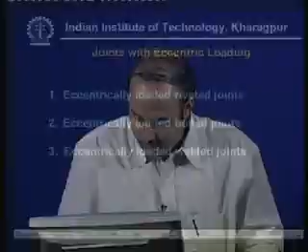the joints with eccentric loading. We have eccentrically loaded riveted joints, then eccentrically loaded bolted joints and eccentrically loaded welded joints.

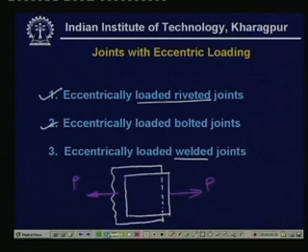Now, let us come to the first case, eccentrically loaded riveted joints. Rivet joints, as we have studied, look like the following. If we have loading here and load applied here P, then the joint load... these are rivets. The rivets are meant to take load primarily in shear, and here you see there is no bending moment acting on this joint, because if we take one small section of it, that is one pitch, then the load is passing normally through the center of gravity of the riveted joints.

But if it does not pass through the center of gravity of the riveted joints, that happens sometimes in the case of brackets or in some other load carrying members, as we shall see in different cases, then the loading becomes complicated and eccentric, and the stresses become also complicated. We have to take utmost care so that the rivet stress does not become too much.

Similarly, we have the eccentrically loaded bolted joints. Now, here rivet joints mainly take load in shear. The bolted joints take primarily load in tension. You may remember we talked of the effect of pre-stress. There we had to initially tense the bolt. By initial tensioning, we relieve the bolt of the final loading if the loading is tension type, but primarily we always talk of the tensile load in a bolted joint.

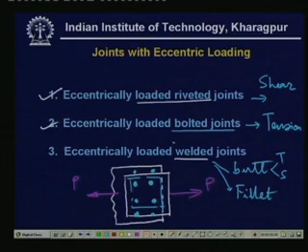This must be very clear from the last lecture. In this lecture we are going to study something of these kinds of joints, that is eccentrically loaded riveted joints, eccentrically loaded bolted joints and eccentrically loaded welded joints.

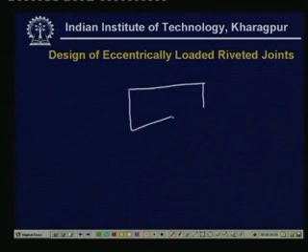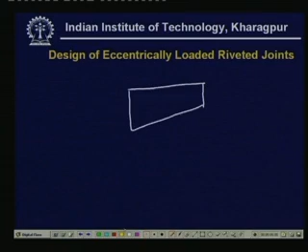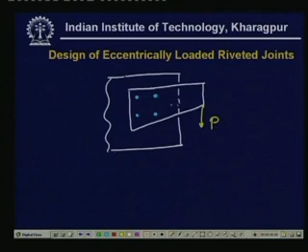Let us now start the discussion of eccentrically loaded riveted joints. See, if we have a rivet joint of this shape, let us say this is the plate which is acted on by a force P over here, and there are few rivets. Let us say there are some rivets here, and it is connected to another plate. Now, clearly you see the cross section, that is the load does not pass through the center of gravity of the riveted joints.

And what is meant by the center of gravity of the riveted joints? Now, if the cross sectional areas are A1, A2, A3, Ai, where i equals 1, 2, 3 and 4, then the center of gravity of these joints is given as x bar, which is equal to A1 x1, the x coordinate of the first rivet, plus A2 x2, plus A3 x3, plus A4 x4, all divided by the total area A1 plus A2 plus A3 plus A4. So this is the area of cross sections giving the center of gravity, the geometric center of the rivets. Similarly, we have y bar, which is equal to summation Ai yi bar.

This x1 bar, x2 bar etc., these are nothing but the x coordinates of the ith rivet. Similarly, we have y coordinate, and if we do this, then we get x bar and y bar, the center of gravity of the entire riveted joint. Let us denote the joint, that is the center at this point. Okay, so this is the center.

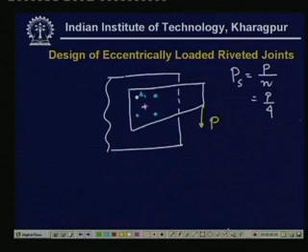If we replace this load, now it is clear from statics that within one rigid body we can remove this load, we can shift this load from one point to the other, provided we add some amount of couple or some amount of moment about the next new point. Let us see what does it mean if we remove this load.

Now, what we have done essentially is to take the load here, so this is the load, but now we have to add again a moment.

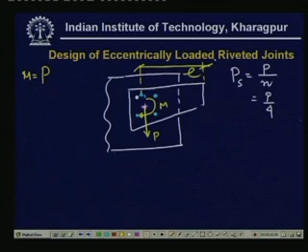And what is the moment? The moment will be equal to, we have to add the moment is definitely clockwise, and this moment M will be equal to P times the length of the arm, and this is the distance. If the eccentricity is e, then this is nothing but M is equal to P times e.

So, this moment has to be added. Now, the internal forces within the rivets will be such that they should balance not only this external force P, but also this external moment M. As we have discussed, because of the direct load P, each of the rivet will experience some shear load, and which is equal to P divided by N, and for 4 such rivets here we have P by 4.

Now, this is true for all the rivets. Now, we have to calculate the effect of the M. Now, here we make an assumption, that is, if you look at this riveted joint more carefully, that is, if you enlarge it, this is this part which I have enlarged. Then the center of gravity is of course here.

Then we make the assumption that each one, the load carried will be proportional to the distance from the center. That is, if let us say this is F2, this force is let us say F1, and this is perpendicular to this line joining the rivet, the first rivet and the center of gravity, and this magnitude F1 which is proportional to this distance.

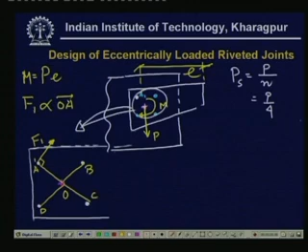If we denote this by OA, B, C and D, then F1 is proportional to the magnitude of OA. The magnitude of OB or magnitude of F2 that is acting on this rivet is proportional to this length OB, and the direction of this force is perpendicular to it, to the line joining OB.

Similarly, on C we have F3 which is proportional to OC and direction perpendicular to the line joining OC. Similarly, OD this way. F4, the magnitude is proportional to OD and the direction is perpendicular to the OD.

Now, here we make these assumptions, and with this assumption we can calculate further. What we see, if we denote this by R1 vector and this is R2 vector, R3 and R4, then we have the following relationship, that is

F1 times R1, the couple about point O, plus F2 times R2 plus F3 times R3 plus F4 times R4, this plus M will be equal to 0. Now, this is the balance of the moment about the point O.

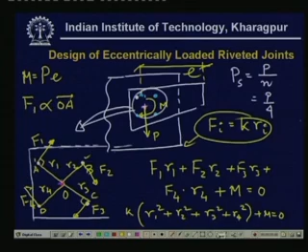So, this is the equation which you get. From this you can solve for K. Directly what you see is that the value of K now is, let us write down in far more legible form.

What you have then is Fi is equal to K, which is equal to minus M divided by summation Ri square, I is 1 to 4, times Ri, and this is equal to minus Pe Ri divided by summation Ri square. So this is now the force acting

on the ith rivet. Now let us see what is the resultant of this force. Remember, we have two forces: one is the force acting because of the direct shear, and each one is carrying the same force, and there will be another force due to the turning action. So we will have to look into the resultant of this force.

Now the resultant will be different for different cases. We study one or two cases here. For the first case, let us say on A, that is the first bolt, we have direct shear force which is equal to P by 4, and we have another one which is perpendicular to this distance, and this is F1.

So with this assumption we make these calculations, we find out the maximum force in such rivet assembly, and then with the maximum force we calculate the maximum shear stress taken by this bolt, and hence we calculate the corresponding diameter, that is we design the joint. So this is the design procedure for eccentrically loaded riveted joints.

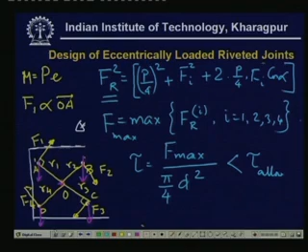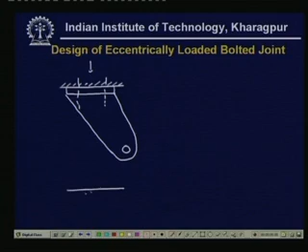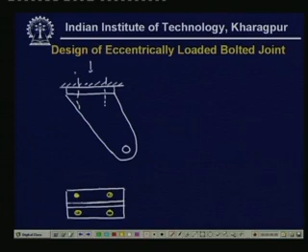Now let us go to the design of eccentrically loaded bolted joint. Here we have two distinct cases. First let us take the example: consider this kind of bracket. There are bolts here, so if you look from this side, top view, now these are bolts, let us say cross section 1, section 2. So there are 4 such bolts, 1 and 2, and the load is acting here.

There is a load P acting. Now you see what will be the effect of P. The P will introduce tension in the bolted assembly. So each bolt will carry some tension, but the tension will not be uniform, because there is a distinct tendency for this bracket to rotate about this point, let us say point A. So there is a tendency that it will rotate about this point because of this load. Therefore, the tension in the bolts will be unequal.

Now what we see is how to calculate the tensile load in the member. We make the static equilibrium, that is, let us say each bolt carries a load F1 and F2. If you write down the static equilibrium equations, then 2 F1 plus 2 F2 will be equal to P, and that is the only static equilibrium equation we have for this case. This is a statically indeterminate problem, because we have 2 unknowns and only 1 equation, so it cannot be solved by means of pure statics only.

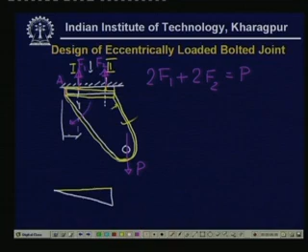There will be some elongation of this bolt. If you draw it elaborately, here this was the initial line, and after that it has rotated here. So now if you denote this length from this point to that point by L1, and from here to there by L2, then this is L1, this point A and point B, and this one is L2.

Now the delta, that is delta 1, the deflection of this, is proportional to this length L1. That is clearly visible because this is a rigid plate, so this angle is constant. So tangent of this angle will be equal to delta 1 divided by this length L1, and the tangent of this angle will again be equal to delta 2, the deflection of this bolt, divided by the entire length L2. So therefore delta 1 is proportional to L1 and delta 2 is proportional to L2.

Then if you use Hooke's law, what you get is that F1 could ultimately be written as F1 is proportional to L1 and F2 is proportional to L2. That is clearly visible because delta 1 is nothing but, using Young's modulus and the original length, let us say the original length is capital delta and the extension is delta 1. So the strain is delta 1 divided by capital delta, which is equal to Young's modulus... I am sorry, this has to go down.

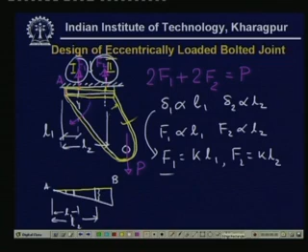Let us come to the next example. Here we have, and we have, let us say, again some kind of arrangement. If you look from this side, then we have this bolt.

So, there are these 4 bolts, and the load is acting over here. The direct effect of P will be to introduce some shear force here, so each of these bolts will carry some shear force.

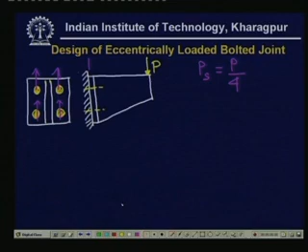Now, what is the effect of this eccentricity? Let us say that there is a distance E from this plane to that of the application of P. Because of this eccentricity, it will try to rotate about this point.

If this is A and B, there is a tendency that it will rotate about this point. Because of this tendency of rotation, there will be elongations, that is, an enormous tensile force will be developed in this bolt.

And again, if you consider the rigidity of this member, that is, if it tilts this way, so this is the tilting, it is very much exaggerated, but the point is that now rigid body statics is not enough, and we will have to consider the deflections, that is the elongations of the bolt. We will have to consider the strength of materials approach.

So, therefore, we make this assumption that this is a rigid body rotation. Now, this bracket is relatively rigid compared to the bolt. So, the bolt gets extended, whereas the rigid body only gets rotated.

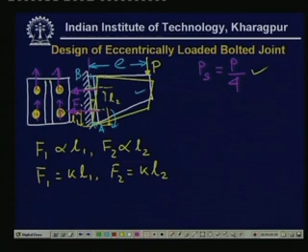If you take the moment about this point, what you get is, considering this direction of force F1 and F2: F1 times L1, the moment about point A, F1 L1 plus F1 times L1, because there are two such bolts. So, twice F1 L1 plus F2 times L2, again twice of that. This is equal to

the external moment, which is equal to P times E. Now, if you use this relationship, that F1 and F2 are proportional to L1 and L2 respectively, then what you get from this equation is twice K, L1 square plus L2 square, will be equal to P times E.

From this you calculate K, which is equal to PE divided by twice L1 square plus L2 square.

Once we have calculated K, then we have calculated F1, because F1 will be equal to K times L1. So this is equal to PE L1 divided by twice L1 square plus L2 square, and similarly F2 will be equal to PE L2 divided by twice L1 square plus L2 square.

Now we have the case where the bolt is subjected to both shear and tensile force. Normally, as I said, the bolts are not meant to carry the shear load. Primarily, the bolts should carry only the tensile load, but if sometimes the shear load occurs, then we have to relieve the bolts of the shear load if possible. So that is done by adding some kind of other bolts, dowel pins, etc.

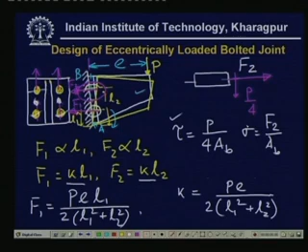This should take off the shear load as small as possible. If you increase the number of bolts, then the shear load may be decreased. So the shear load is reduced as far as possible, but if further is not possible, then we will have to consider the effect of the shear stress as well as the normal stress. We have the shear stress and the normal stress, and then we calculate the von Mises stress.

You know that when we have both the stresses, we can calculate sometimes the von Mises stresses, which is equal to sigma square plus thrice tau square.

This is one failure criteria, where the material fails if this is greater than sigma allowable. Another failure criteria is the maximum shear stress, tau max, which will be equal to square root of sigma by 2 square plus tau square, and this must be satisfied. So these are the two criteria by which the ductile material will fail.

If it is made of brittle material, which seldom happens, then we will have to consider the maximum principal stress, given by the well known formula: sigma by 2 plus under root sigma by 2 square plus tau square, and if the material is of brittle nature, then this should be less than allowable.

So these are the few failure criteria which you will have to consider, but the main important point is that the bolts are subjected to both shear stress as well as normal stress, and when you calculate the normal stress, you will have to make the assumption that the bracket is more rigid compared to the bolt. Therefore, the bracket actually rotates about one of the points, but the bolts will get elongated, and the forces will be found out accordingly using the geometrical relationship. So that must be clear.

This is again a case where statical determinacy does not exist. So this is a statically indeterminate problem, and we will have to take the help of the flexibility of the members. Now this is about the design of eccentrically loaded bolted joint.

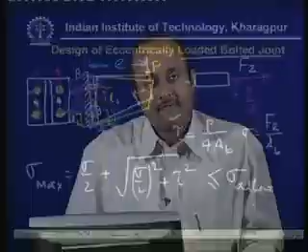Remember, I repeat, we have considered two cases. In one case, the load is acting such a way that the bolts are entirely under tension, there is no shear force, as we have seen from the first example. In the second example, the bolts are now under shear because of the direct action of this force, and it is again partly under tension because of this eccentricity. So eccentricity makes the design of joints quite complicated, as you might have understood by now. So this is about the eccentrically loaded bolted joint.

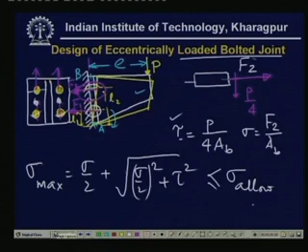Now we come to the third case, where we have the eccentrically loaded welded joint. There are again a few examples, we take them one by one. Let us consider the case where a plate is welded to a structure.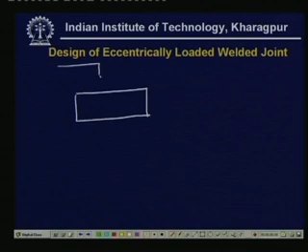Now the welding can be done in various ways. The welding may be on this side, that is, it may be a transverse fillet welding. There are two kinds of welding: one is butt welding and another is fillet welding. Normally, in this case, we use the fillet welding. There may again be two types of fillet welding, one is transverse fillet and another is the longitudinal or parallel fillet. Let us say that here this is a parallel fillet.

So we have the fillet joints here, fillet joints over here, and the load is now eccentric loading, in these directions. Remember, in earlier classes we have studied the design of this welded joint. In that case, the load was along these directions, but now instead we have load in the other directions.

So, what is the effect of that? That is what we are going to study.

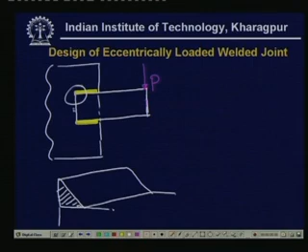Now, if you look a little bit closely, the fillet weld looks like this. This is the plate, and this is the welded part. So, this is the fillet, and the critical section is the section of the throat.

So, this is the critical section, and the failure may take place in this section itself.

Now, when we consider the eccentrically loaded joint, in addition to the shear force there are two kinds of stresses: the direct shear force and the direct shear stress. The direct shear stress value, tau, will be equal to P divided by twice the area of the throat, because there are two such welds.

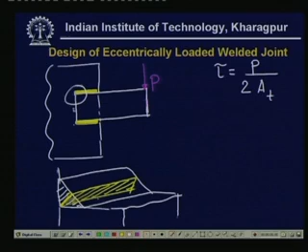And what is the area of the throat? If this leg size is h, normally the fillets will have equal dimensions, at 45-degree angle. So the throat area will be equal to throat times the length. If these two lengths are equal, area will be equal to T times L, and this is equal to H by root 2 times L, and therefore the shear stress will be equal to P divided by twice H by root 2 L.

So, this is the direct shear force acting on this joint, but what will be the effect of eccentricity? We see that eccentricity will try to rotate this entire plate about some axis, and that axis is nothing but the center of gravity, the geometric center of this welding.

That is, there are two welds, and we can always define one geometric center here. How do we define this geometric center? It is again based on the throat area. What we do is depict the entire welding in terms of the throat area.

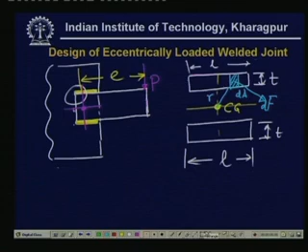Similar assumption is made here: this force is proportional to, that is dF, the small force acting over the small area dA, is proportional to the distance r. So, therefore, we can write down that dF, the magnitude, is proportional to r, with this as the proportionality constant, and the area of cross section.

In a sense we say that the stress is proportional to R, and the forces will also depend on the area of cross section. So, this is the total force acting on this infinitesimal area dA.

So, therefore, the net torque T will be equal to dt, which is equal to R times dF. The direction is again important, such that it tries to rotate. So, the direction of this force dF is perpendicular to this line, the vector joining CG to that infinitesimal area.

So, the total torque will be equal to R times dF. This is the torque over this infinitesimal area. Hence, the total torque will be equal to the integral of this, which can be written as K R square times dA, and this is over the entire area.

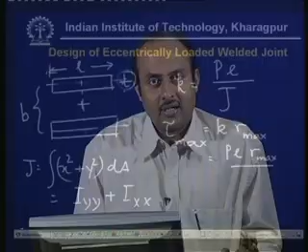So, the higher order terms containing T are sometimes neglected, and in the book there are some tables available which contain the value of J for unit thickness, that is we consider T to be unity, but of course this unity is again a very small thing, so we neglect many other higher order terms, and what you get is the value for unit T.

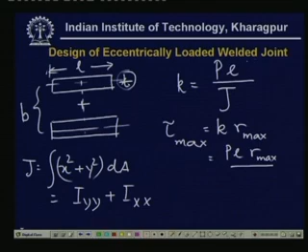Now, if you have this relationship, what you have to do is just take this data and multiply by the throat length, which is equal to h by root 2. H is the leg or the height of the fillet weld. So, if you do that, then you get J, and tau max will be equal to Pe R max divided by J.

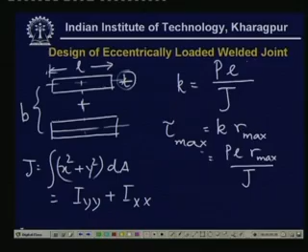What you have now is tau max. The direction of the force means you cannot add vectorially to stresses, but you can add vectorially to forces. So over a small cross sectional area, you can calculate dF, the force due to the load, the direct shear stress and the shear stress due to the torsion, and then again add vectorially to find out the maximum shear stress, and using the maximum shear stress theory you can find out the different design parameters.

So, this is roughly the way to calculate welded joints when there is eccentric loading. Let us recapitulate what we have learned. We learned how to calculate the strength of joints with eccentric loading for riveted joints, where mainly shear stresses exist. In bolted joints, there may be cases where only tensile force appears, or cases where both shear force and tensile force appear, and in eccentrically loaded welded joints there is a case where shear stress will appear. Sometimes we can have tensile force, but we are not going to discuss them here. So, this is all about eccentrically loaded joints. Thank you very much.

Let us begin the lectures on machine design part 1. This is lecture number 26, and the topic is design of joints with variable loading.

In the last few lectures we have learned how to design the joint for strength under various static loadings. In the last class we learned how to design the joint for eccentric loading, and in this class we are going to study variable loading. Variable loading is very important for any machine components. In structural joints, normally the loading is static, but in machine components there will invariably be some movable parts, and because of this movement there will be forces which are normally fluctuating in nature. So these are to be taken care of while designing it.